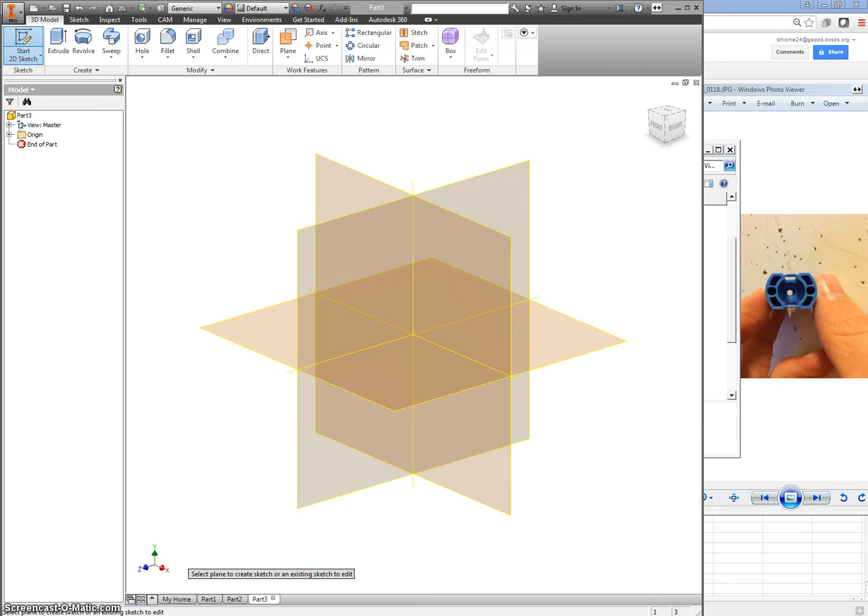Okay, this is the last request from Justin. This is another flashlight part, and this really doesn't look too bad, so it shouldn't take very long. When I look at this, I see 1, 2, 3, 4 circles that make up the main body of it.

So I'm going to make one and use my offset tool. I'm going to make the distance between these two and the distance between these two the same. So I'll make this a function of the one above it. And then...

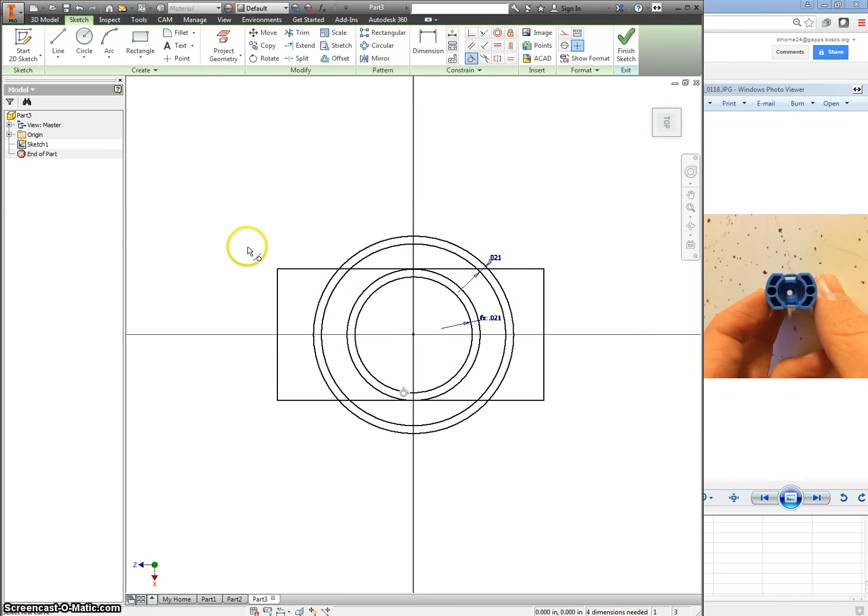I'm going to use my rectangular tool. And I think instead of messing around with making it aligned, I'm just going to make it tangent to the other circle. So if I want to change this, let's make the inside circle smaller, because it looks like it kind of cuts off right there.

I will, however, make another 2-point rectangle that goes up the middle of it, and this one I will have to make the midpoint aligned with the center point here, because there is a break slightly between the two.

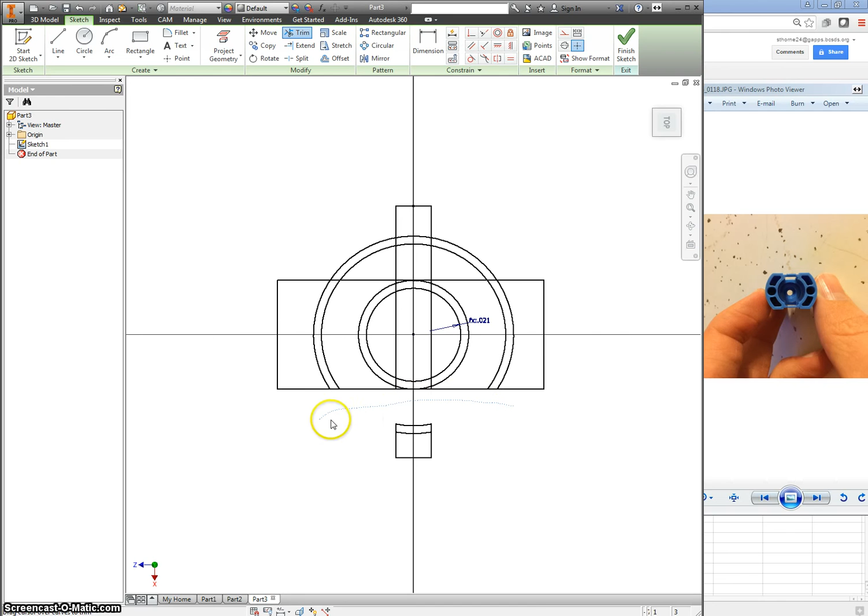So I'm going to switch to my trimming tool. I'm going to get rid of the parts that we don't need. Which gets a little bit tricky here. What exactly am I keeping?

Oop, not that. I'm going to undo that.

Let me offset this rectangle in. And the distance that I'm offsetting that is going to be the same as this here. Okay.

Now I can really start to get rid of stuff. Trimming tool works really well if you just want to drag straight through something.

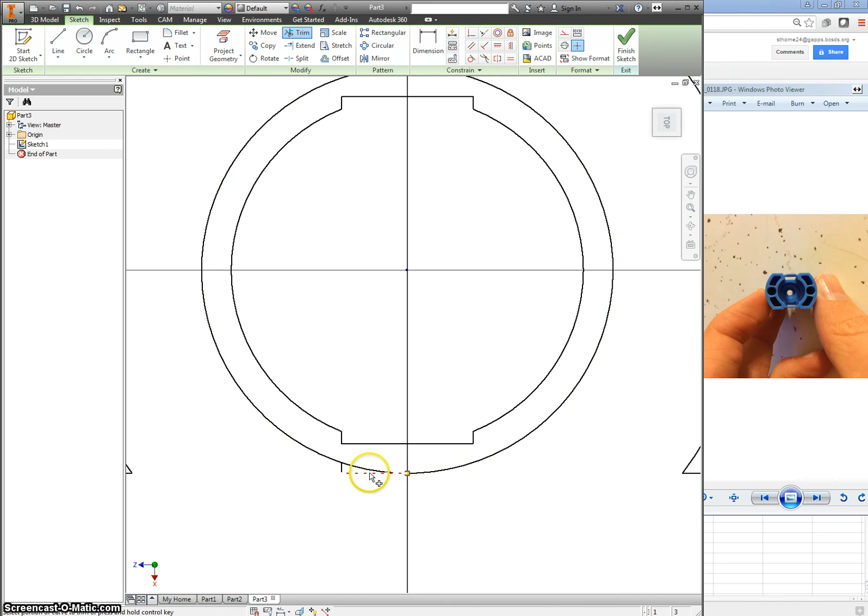You can also just click on individual lines if you want to be more precise with it. And then to get rid of this other stuff above and to the sides, it's a lot easier to just highlight a box all the way around them and delete instead of trying to trim them all. You could trim, it'll just take you more time.

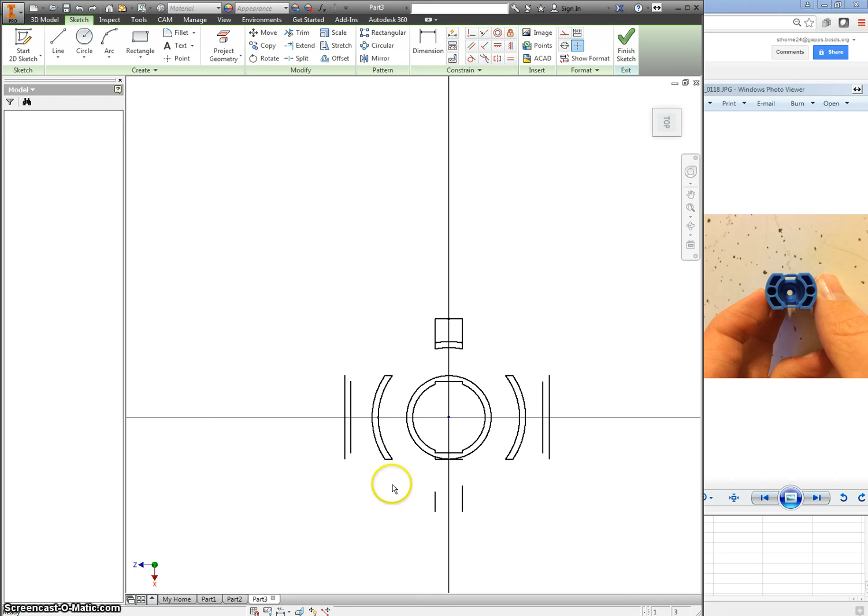And I meant to leave that box over there. Oops. Should I go back? Yeah, I guess I'll just go back. Control-Z should take you back a couple of steps. Further than I wanted, but not too bad.

Alright, I'm going to keep these lines here. There we go.

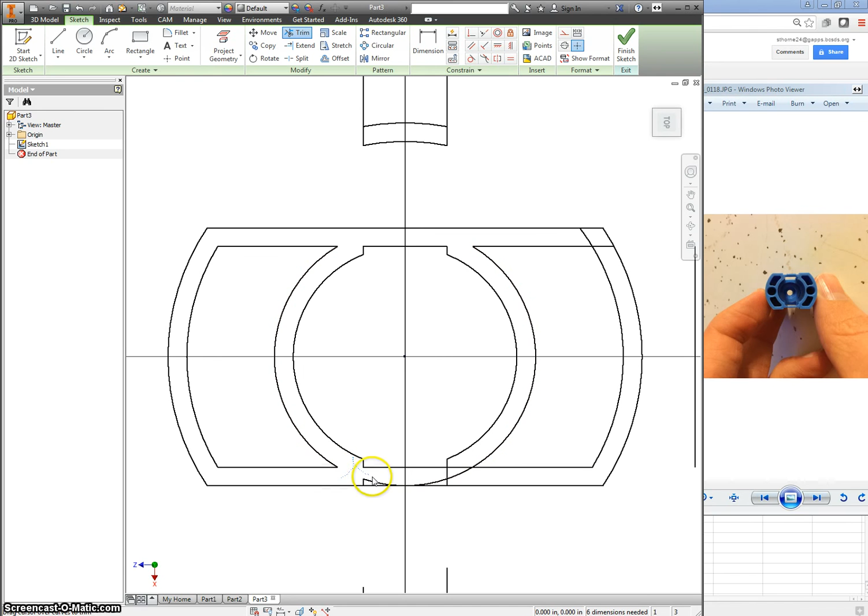Alright, now this is almost where we want it. Just highlight and delete the stuff we don't want. Forgot one. Okay, we have these little circles in here.

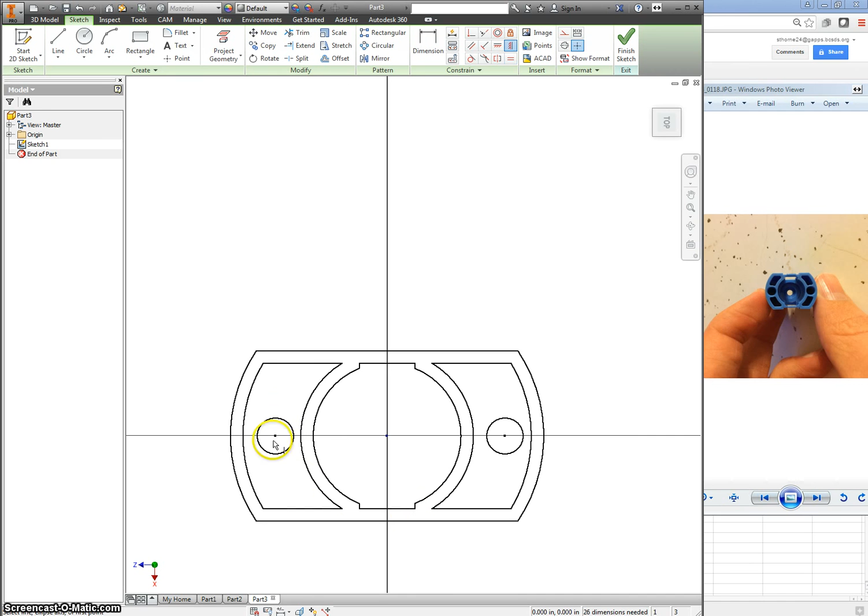I want these two to be equal. I want them to line up. So I'll make that center point line up with that, this center point line up with the middle.

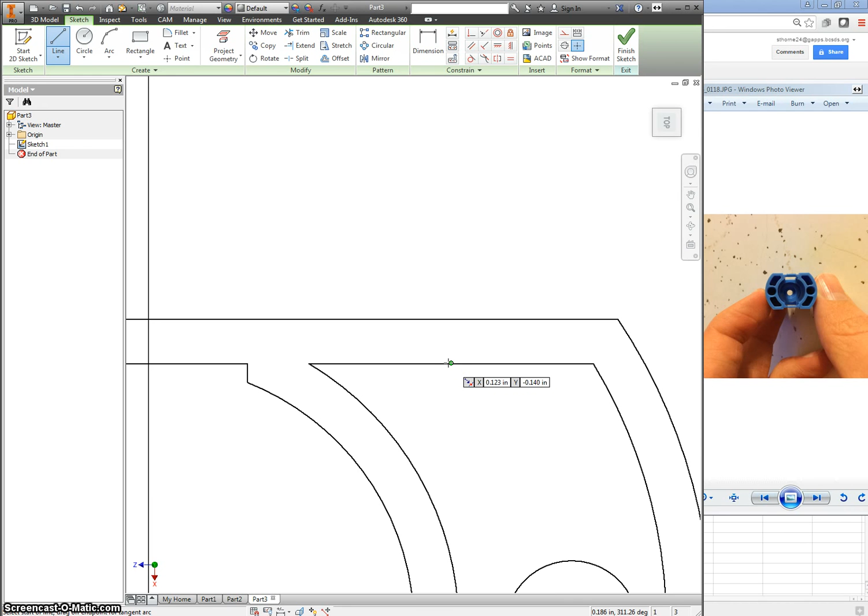I'm going to try and make a line on this segment, if it'll let me. Looks like it's having issues with finding the midpoint. Well, I don't know if I like that endpoint anyway.

Alright, so let's assume that you can measure in between here. That's something we can do, actually. Looks like it's having issues with that too.

Okay, I'll make one more circle. I want it to be halfway between these two lines. So again, if you had dimensioned this yourself, you would know what this circle should be. And I am going to make a coincident constraint where the center point of that has to be on this circle.

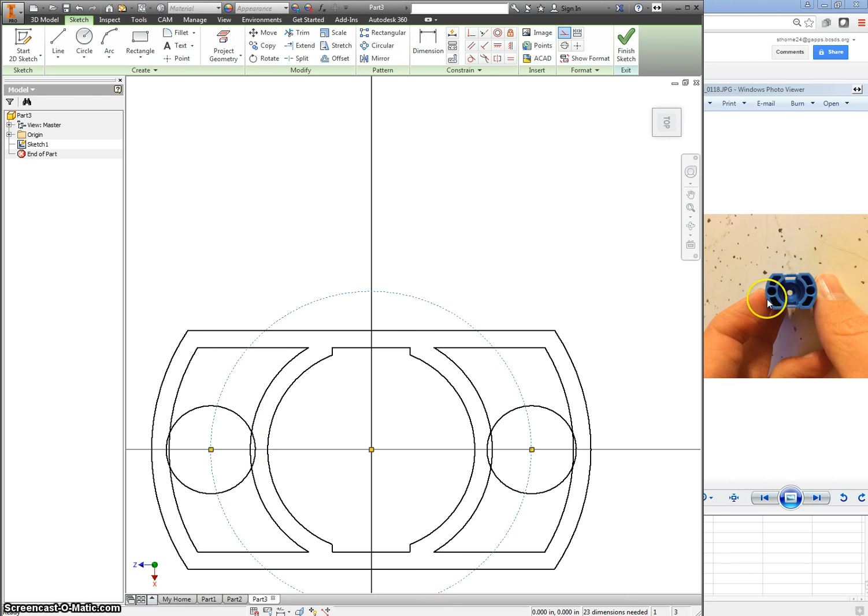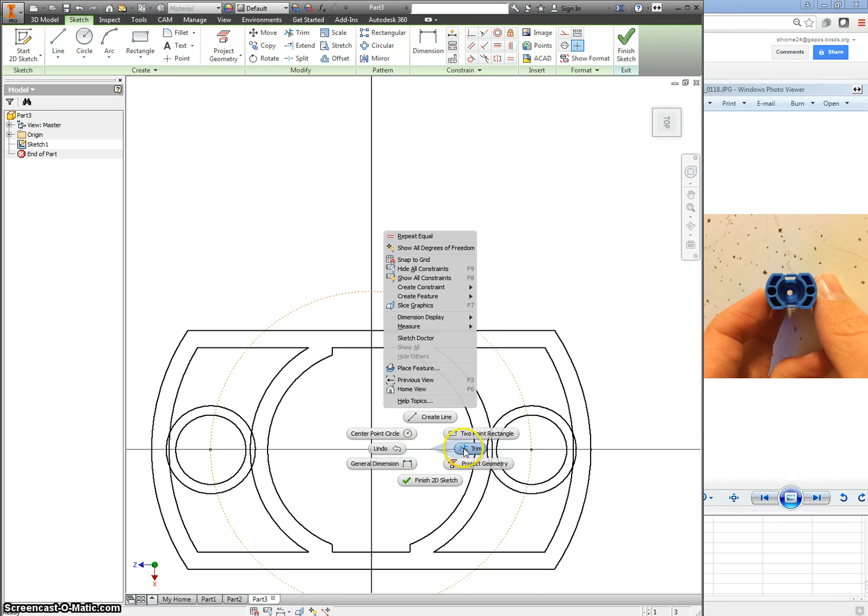Looks like it actually cuts in just a little bit. I'll make another circle on the inside here. I want those two to be equal, so I'm going to use my trim tool again

to cut between these. Okay, now that I have my basic shape, I can extrude that up.

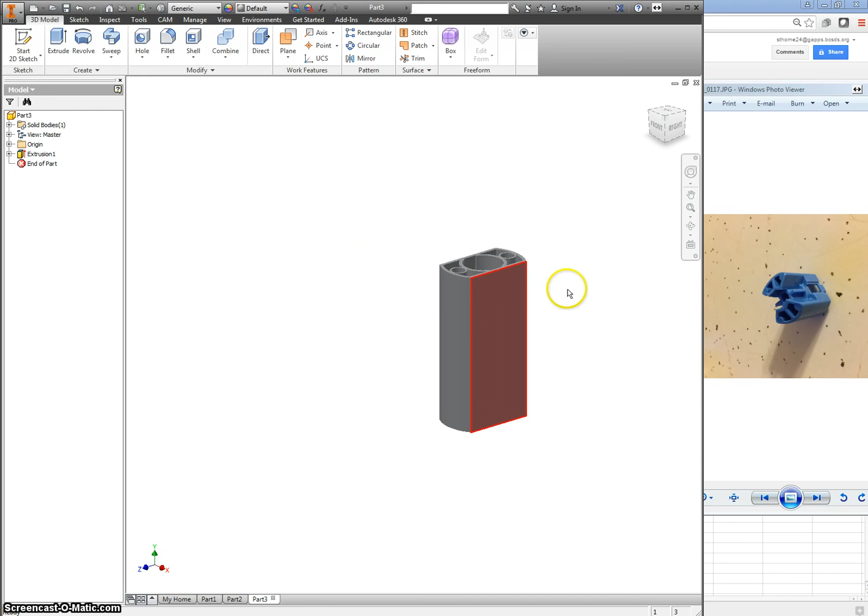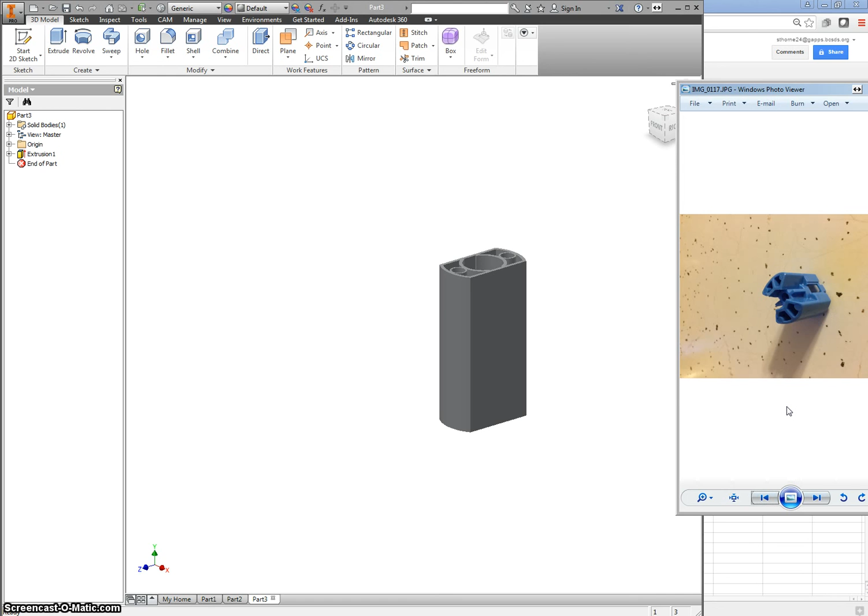And are these two the same piece? Looks like that might be the bottom and this is the top. It's a little tricky to tell what exactly it is I'm looking at here. Almost looks like these are two different pieces.

Anyway, this should get you this main piece. You can always make a new sketch down here. One way you can do that, if you can measure how far down all this stuff starts, you can click plane, and highlight over the top of this surface, drag it down whatever distance you need.

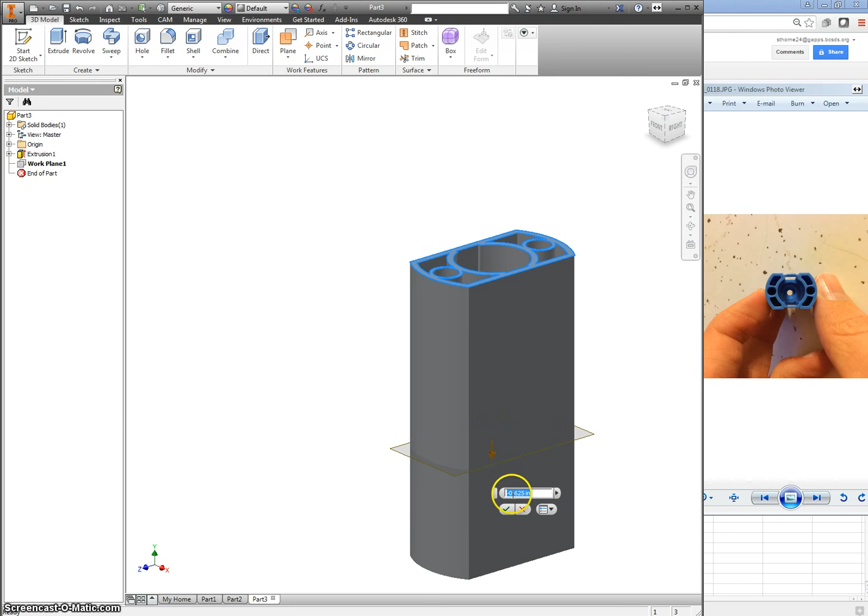And it did give me an option, I ignored it, to type in an exact distance. I have it at 0.625. So I'm going to right click and make a new sketch on this, and here when I start to make my new circles for the inside of it,

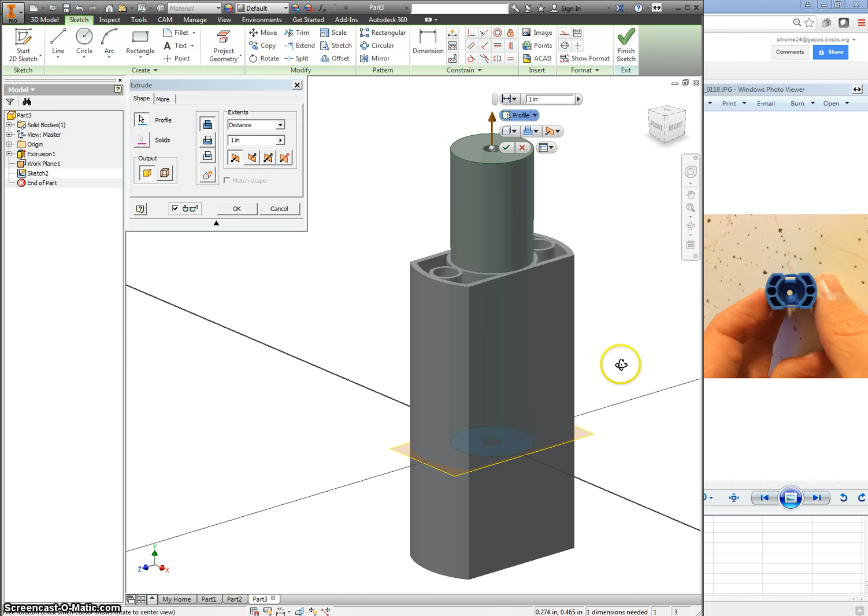you can see it's just making that off of that plane. If we wanted to go down instead of up, we can change it, and it doesn't change it to cut. I know some of you like to try and use the direction to cut or add material. Try not to do that because these buttons are actually cut and add. This just changes the direction it goes off the plane.

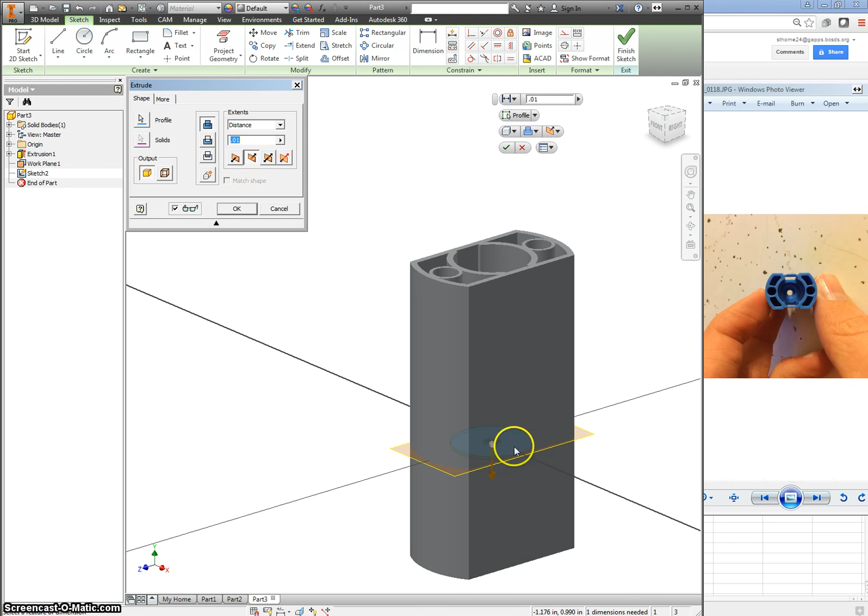Okay, so let's look at it from the top again. We have that now. If we wanted to make that kind of curved going in, again, it's hard to tell what exactly is going on, but we can find the plane that cuts through the middle of this, make a new sketch on it, right click and slice graphics.

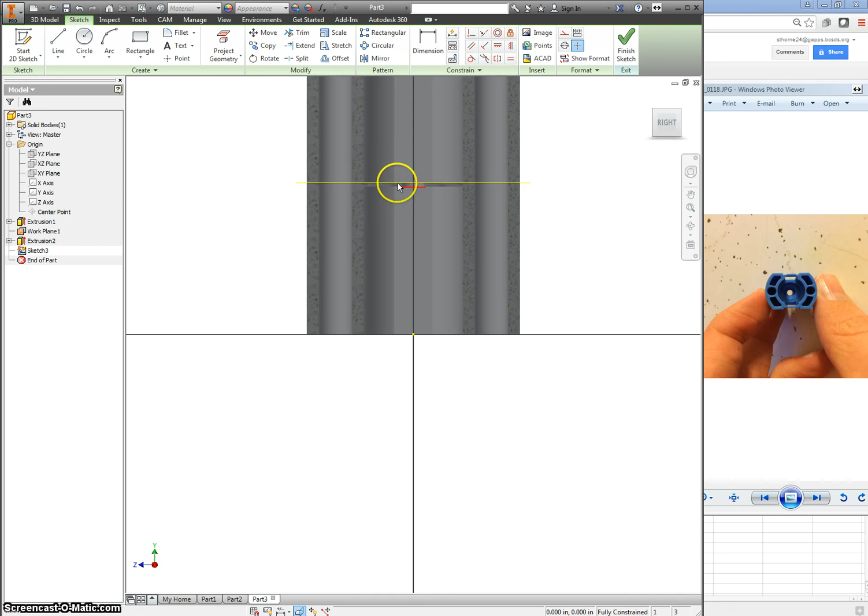This is the sketch that we just made. If we don't like it so well, and we wanted to make a little bit of a curve on it, I could use a 3-point arc.

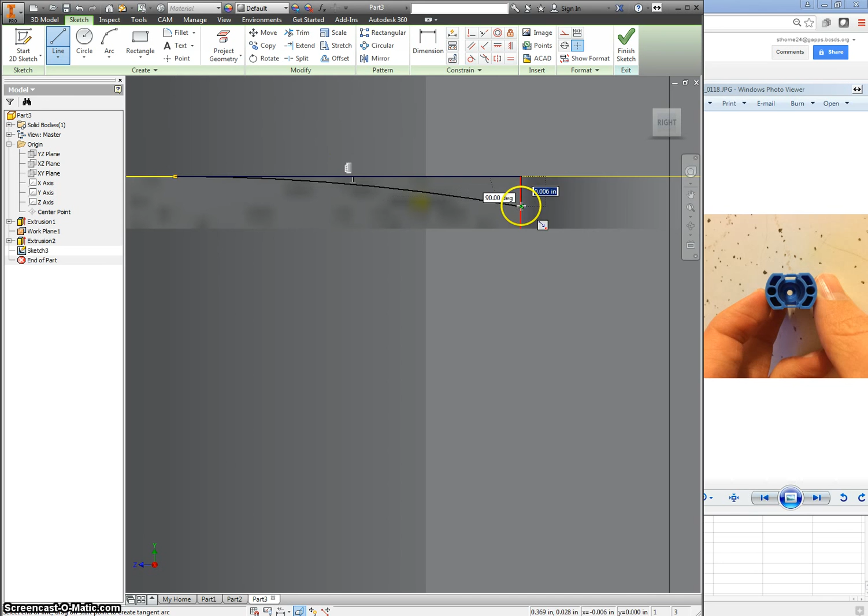As long as I close off my shape so it has... I don't even see this one. Okay, so now I have a top line, side, those 3 parts. Now I can revolve it. The axis is going to be the axis that goes through the middle, and I can remove material.

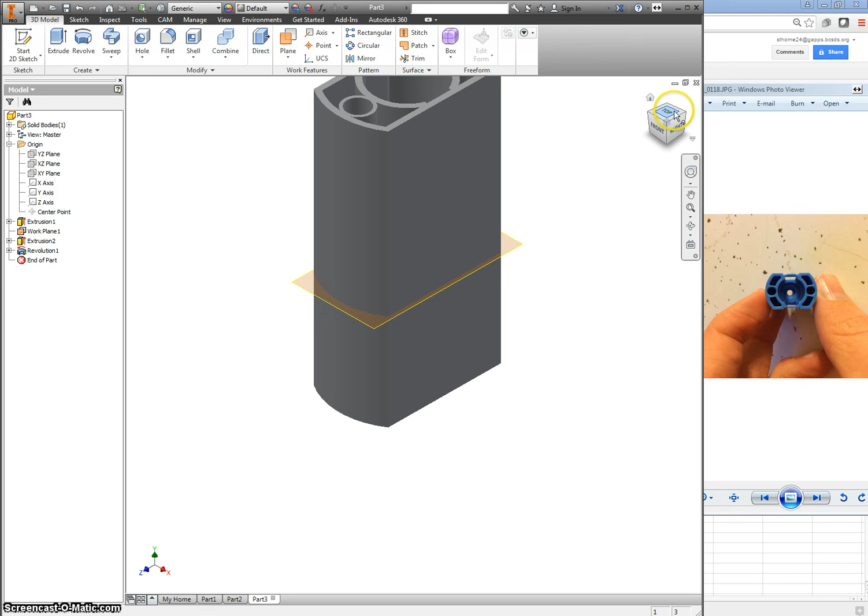You can't tell from here, but now that surface has a rounded feature to it. You can kind of see there, it has that shape on the inside.

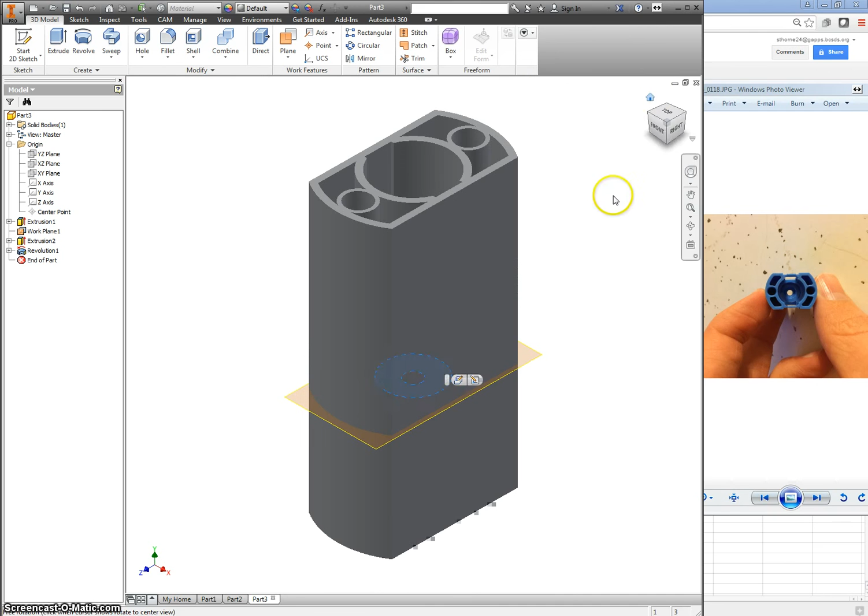This is going to be very similar. I don't know if this is a different part or not. I don't think I'm going to make a different video for it. Sorry, Justin. But you should be able to use about the same kind of thing.

You're going to start off with a couple of circles. You're going to draw the lines in between, extrude those out. To get this as a different height, use a plane like what I did here. Go down a certain distance, make this new sketch with a square and a circle, a couple rectangles above and below, and extrude that down some distance.

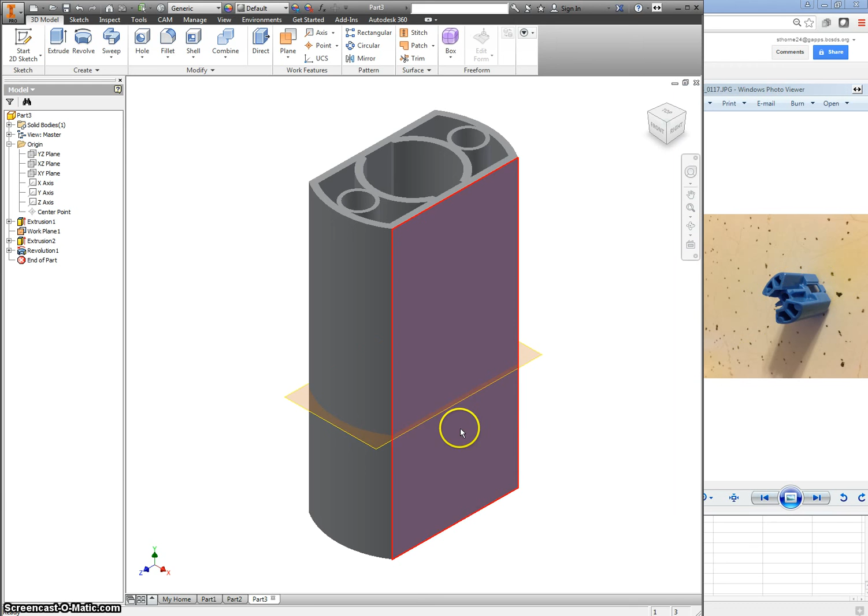Okay. Best of luck to you. Things like this, feel free to make a sketch on any flat surface that you have.

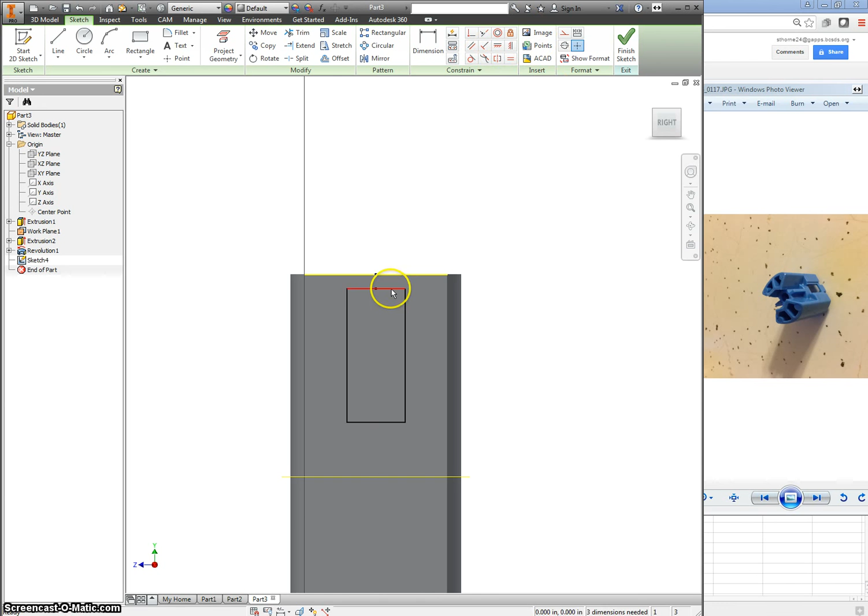Be careful when other lines pop up, it might snap to that geometry, and more than likely you don't want that. So just something to be wary of. Use your geometric constraints, these are really handy, make sure it's exactly where you want it to be. And you can cut, change your distance to all, have that go all the way through the part.